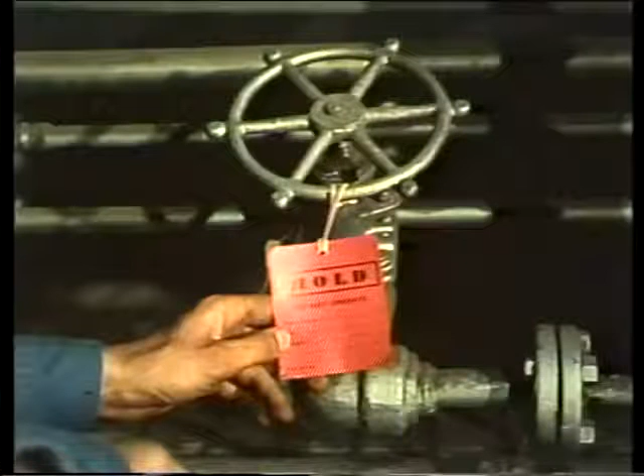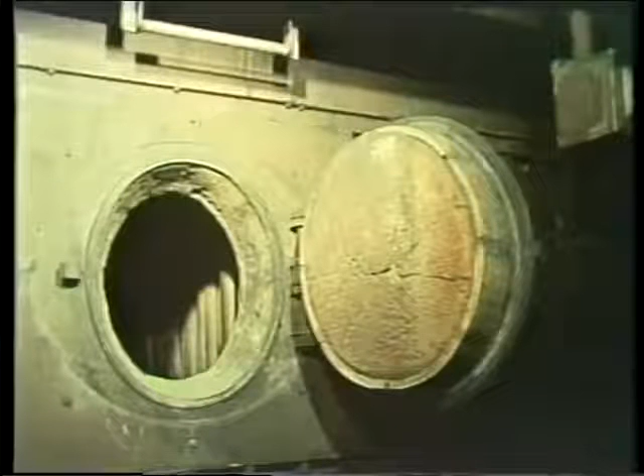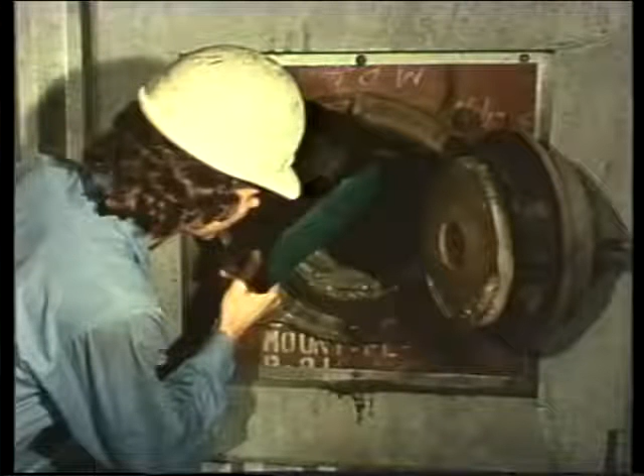Tagging out guarantees that none of the valves will be tampered with during inspection. Once the valves are tagged out, access and inspection doors should be opened to cool down the boiler. Immediately after shutdown, and while the boiler is still hot, go to every opening in the boiler and listen for leaks. If there's evidence of leaks, note the location. After you've listened for leaks, the boiler should be cooled down.

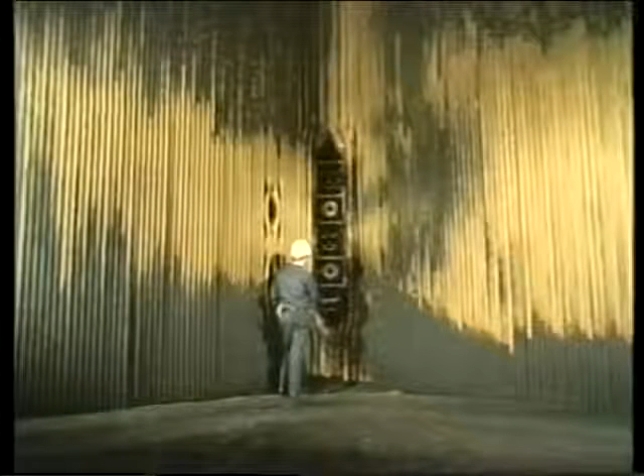Now, once these preparations are complete, the first fireside component you'll be looking at is the water walls. The water walls are made up of water-filled tubes that line the inside of the furnace. When the furnace is in operation, heat is transmitted through the tubes to the water, which is eventually converted to steam. Water walls have four common problems: overheating, support failure, ash accumulation, and refractory failure.

Overheating in the water wall tubes leads to warping, leaks, and tube blisters. Warping is caused when a section of the water wall overheats. This is fairly easy to spot. It may be indicated by a large number of leaks in a small area of the water wall. Now, tube blisters, like these right here, are bulges in the tube surface, which form when the tube metal becomes so hot that it softens and is pushed out by the boiler pressure.

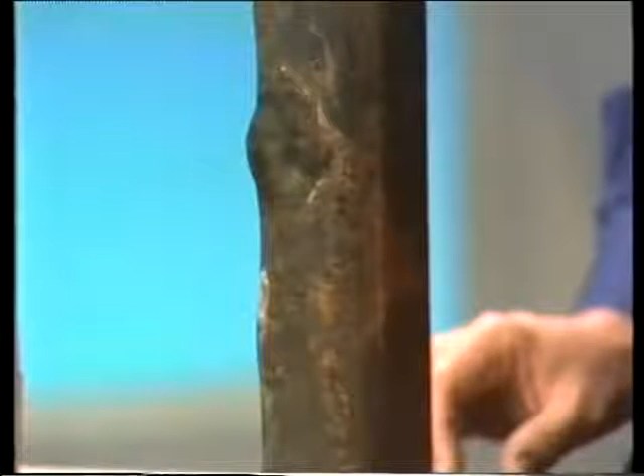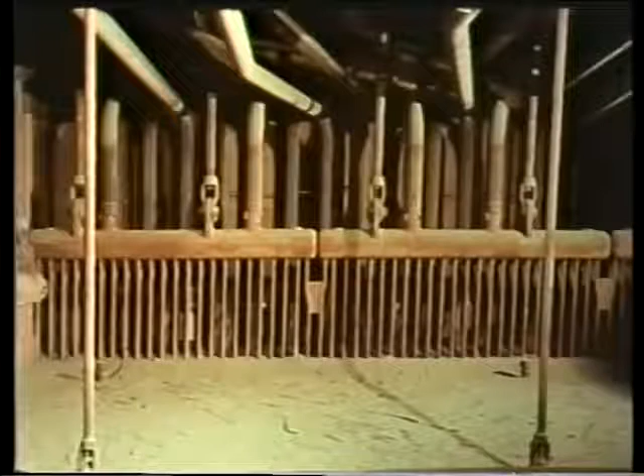Now, the next problem, support failure, shows up in the water walls as vertical misalignment of its tubes. Water walls are attached to headers that are usually hung from the top of the boiler. Now, if the supports holding up a section of the wall break, that section will sag. And if that happens, you'll see a section of tubes that is lower than the others. It's important to check this out because support failure could lead to the collapse of the entire boiler.

Now, the third problem affecting water walls is excessive ash accumulation. This can be plainly seen by looking at the water walls. There are two kinds of ash accumulation to look for: ash that adheres to the entire water wall and clinkers that are fused to it. Now, clinkers are dangerous since they're large and they can hurt someone if they fall. Be sure to clean them away before working inside the boiler.

Now, another problem we need to discuss is refractory failure. This is a piece of refractory right here. It acts as insulation in the boiler. Refractory failure usually occurs wherever refractory is exposed on the inside of the water wall. Typical areas where you can see refractory are the burner openings, the ash hopper area, inspection doors, and air inlets.

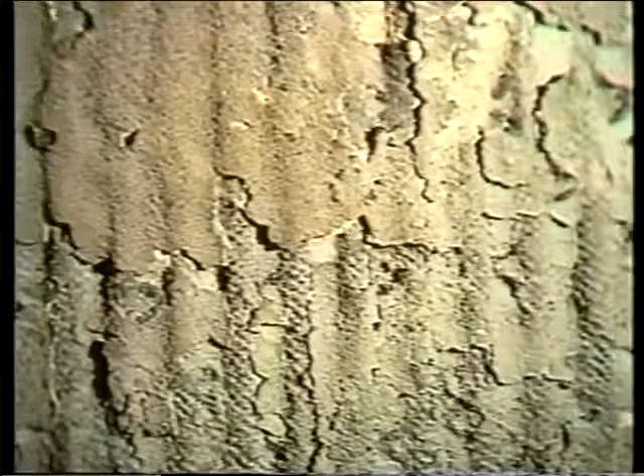And what you should look for are things like general deterioration, or cracks, or water damage. Refractory has other potential problems: spalling, cracking, and slag attack. Spalling is the flaking away of refractory. It's caused by improper installation of refractory, by sudden temperature changes, or both. Cracking is due to improper installation or sudden temperature changes.

Slag attack is the chemical reaction of ash and refractory. Slag attack erodes refractory, reducing its thickness. It melts the refractory and causes it to run off. Slag attack may also cause refractory to become soft and crumbly. In some cases, slag attack will produce a glassy surface.

Refractory failure, overheating, support failure, and excessive ash accumulation are not the only things to look for during a fireside boiler inspection. There are also metal problems, such as surface deterioration, failure of previously repaired areas, failure of construction welds, and leaks. Surface deterioration, like water wall erosion, can be caused by steam or water, fuel, combustion gases, or soot-blowing air or steam. Erosion can cause tube thinning.

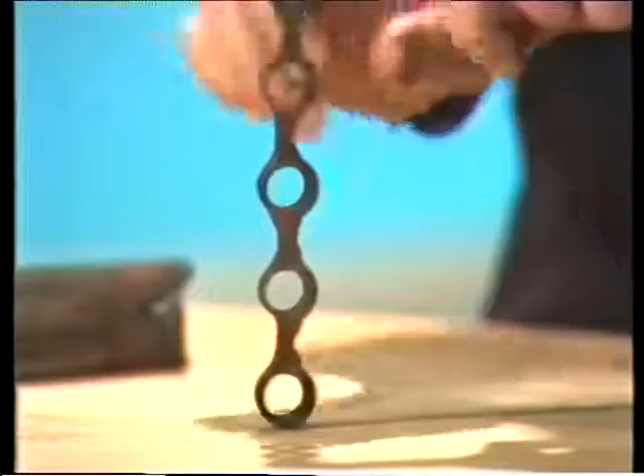Tube thinning is a serious concern because the thickness of tube metal provides strength to contain boiler pressure. Now, these tube sections were cut out of a water wall. You can see how much thinner this side is than this side. When the thickness of a tube is reduced, the tube is weakened, and this can result in tube failure.

All boiler tubes have an acceptable minimum wall thickness. When you inspect the tubes, you have to be aware of the amount of tube thinning that can be tolerated before repairs are necessary. Now, to some extent, tube thinning can be determined by looking at and feeling the tubes. You can tell that local thinning caused by erosion has occurred because you can see and feel a gouge in the affected tubes.

Erosion can happen wherever there is any flow across a boiler component. Erosion from steam or water is caused by leaks in the water wall tubes. When a tube leaks, a stream of water or steam shoots out, and if it hits a nearby tube, this stream of water or steam will wear away some metal, possibly causing more leaks. Carefully inspect the area around leaks for evidence of tube erosion. Eroded areas, as well as the original leak, should be repaired to guard against future tube failure.

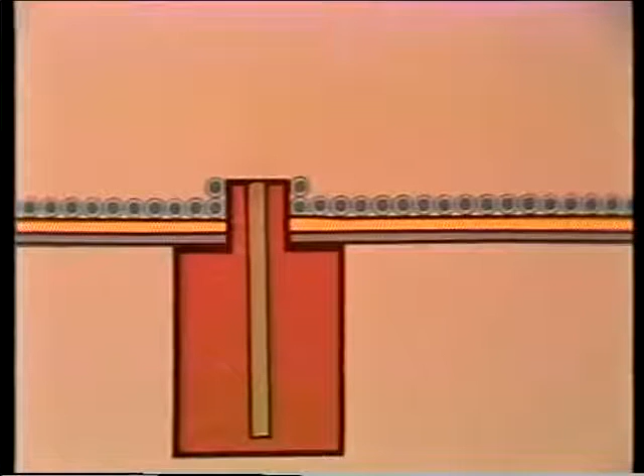Other problems besides erosion may crop up in the soot blowers. Soot blowers enter the water walls through openings that should be checked when inspecting the water wall. Look for damage to exposed refractory in and around the openings. Make sure the openings are clear of ash and slag. Also, check to make certain that all the soot blowers fully withdraw. Heat in the furnace can damage the soot blower lance.

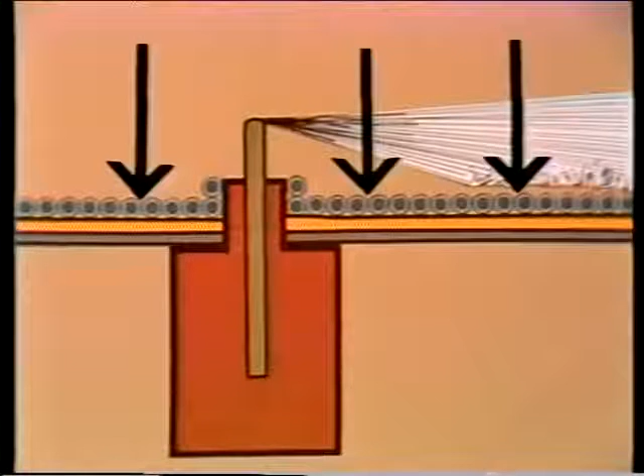Erosion is still a major concern here. Check the tubes around the soot blower openings for erosion that may be caused by steam or air coming from the soot blowers. If you find any, the soot blower may be improperly aligned, that is, blowing against rather than across the tubes. Now, if that has happened, both the soot blower alignment and the erosion must be corrected.

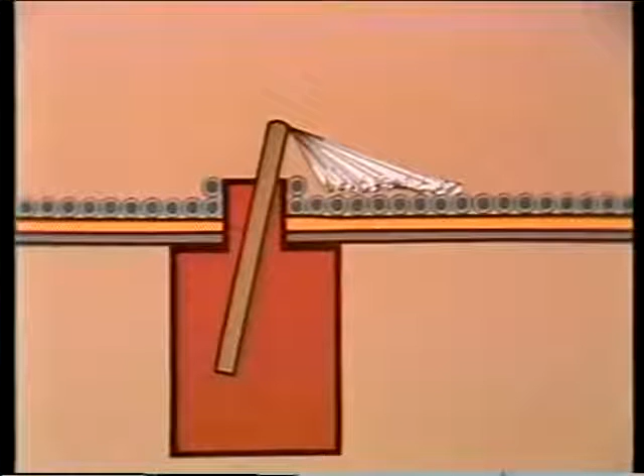Corrosion is similar to erosion. Corrosion is the gradual wearing away of metal by chemical action. Rust is an example of corrosion and is most likely to occur when tube metal gets wet. Another example is corrosion from soot or ash. Soot or ash can be found anywhere in the boiler. Generally, though, corrosion occurs in out-of-the-way places. Corrosion caused by rust, soot, or ash is detectable because of its coloration, mostly red or green or yellow.

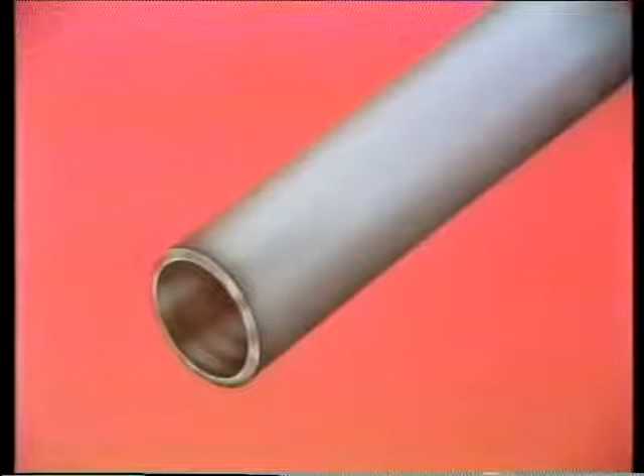Corrosion and erosion are only two problems that you might find on the outside of the water wall tubes. Other problems to watch for are pitting, cracking, and scale formation. Pitting is a type of corrosion and appears as small craters in the surface of the tube metal. In severe cases, pitting can weaken the tubes, eventually causing failure. Cracking can also result in tube failure. Any sized crack in the tube surface weakens the tube. Once a crack is formed, it tends to grow deeper. Over a period of time, the crack will penetrate the tube wall and cause a leak.

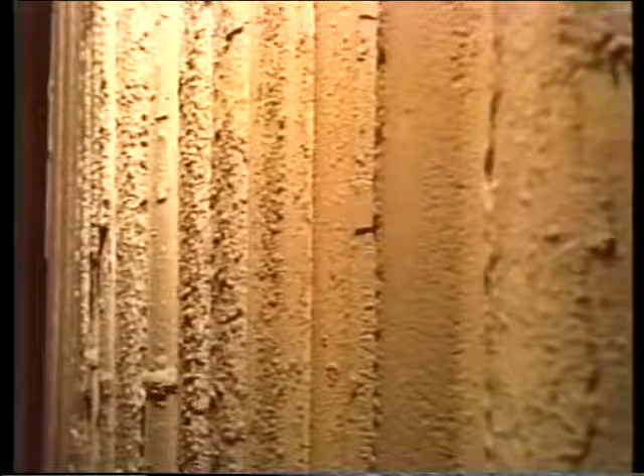Finally, scale on the outside of the tubes presents two problems. For one, scale, like ash, insulates the tube and prevents proper heat transfer. This reduces boiler efficiency. The second problem is that corrosion may occur beneath the scale where it can't be seen.

Checking for all these problems does not end your inspection of the water wall. Old repairs must also be checked. Careful records should be kept of each repair, what it was and where it was located. During each inspection, previously repaired areas should be examined to make sure the repairs have not failed. A failure that happened in a particular area once may happen there again.

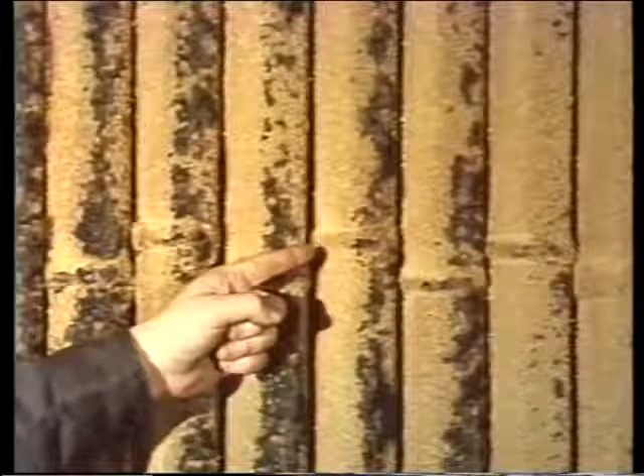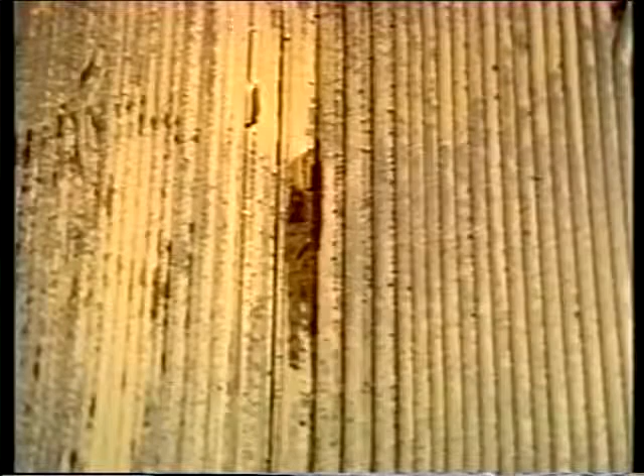Another water wall item to check out is construction welds. These joined the tubes together when the boiler was first built, and they're subject to leaks. Leaks in general are the fourth potential problem in the water wall tube metal. Since the boiler is shut down during inspection, water may not be spouting out of the leaks unless the boiler is under pressure. So, to detect leaks at the welds, look for dampness on the tubes or discolorations of the water wall. Any visible erosion or corrosion anywhere may be evidence of leaks. Also, any tube crack may be a leak.

We've gone over 4 potential problems with the metal in the water wall tubes. Surface deterioration, including erosion, corrosion, pitting, cracking, and scale formation. Failure of previously repaired areas. Failure of construction welds. And leaks.

Earlier, we covered preparations for a fireside inspection and many of the problems you must look for in the water walls. Let's pause for a few minutes so you can review all of this material before we continue.

Now that you're familiar with some of the problems to look for during water wall inspection, let's discuss how you find them. We'll go over some inspection procedures and why they're needed. Boiler inspection actually starts before you enter the boiler. Listening for leaks, for example, is part of that pre-entry inspection. Most of the inspection, though, takes place after the boiler has cooled down and you can get inside. Once inside the boiler, you can determine the exact location of leaks identified during your pre-entry inspection.

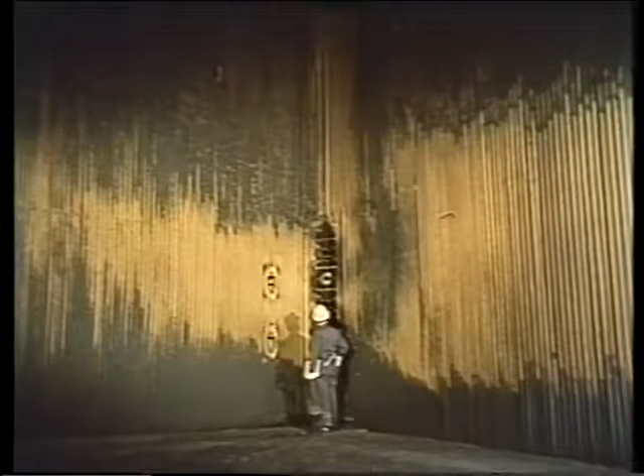You might be wondering how you can get close enough to the boiler components to inspect them. After all, a good-sized boiler may have water wall 150 feet tall, and it's difficult to see the kind of details we've been discussing if you're looking up at them from the bottom. Well, there are 2 ways of coping with this distance: movable and fixed scaffolding. A movable scaffold, like a spider, can be used for looking over most of the water wall.

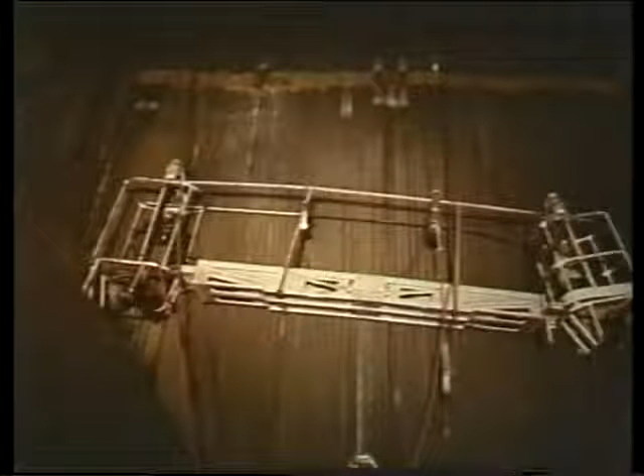Fixed scaffolding can be erected inside the furnace to reach areas that need to be inspected. You probably won't use fixed scaffolding unless extensive work must be done on the water wall. Scaffolding can be hung from the furnace roof or built up from the bottom of the furnace. Fixed scaffolding provides a stable work platform, but it takes a long time to build.

You can also inspect the water walls from the bottom of the furnace and through the inspection doors. It's easy and quick, but it's not very thorough. Using a spider is more thorough, while fixed scaffolding gives access to a larger area. Whatever method is used, the best possible lighting should be rigged in the boiler in order to improve your visibility.

When you begin the inspection process, there are several tools that you should have with you: an inspection mirror, a small hammer, a scribe tool or knife, a wire brush, and a flashlight. An inspection mirror will be useful when you look at the water wall through the inspection doors. Use it when inspecting places in the water wall that are not easily accessible.

Now, a scribe tool or knife is used to scrape away ash buildup and scale to expose the bare metal. A wire brush can also scrape away ash and scale. A flashlight is needed because the boiler's normal lighting may not be adequate.

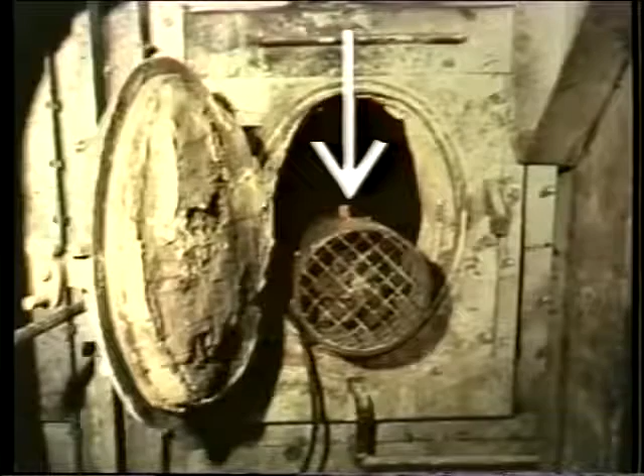Make sure there's adequate ventilation in the boiler. One way of doing this is to set up a fan in the inspection door like this. Also, make sure that no harmful gases are present. Clinkers and accumulations of ash should be removed from the boiler walls. You don't want them to fall on you while you're inside the furnace.

Besides standard safety gear like a hard hat and safety shoes, additional equipment including eye protection, gloves, protective outer clothing, and ear protection might also be necessary. Special precautions are needed when you're above the boiler floor. For example, using a spider calls for additional safety precautions because you're working at great heights.

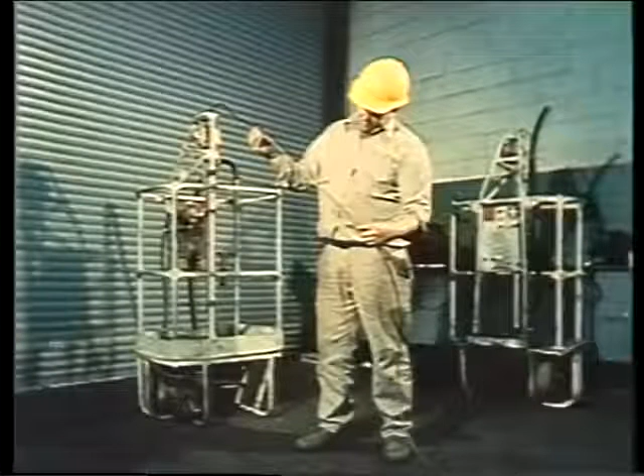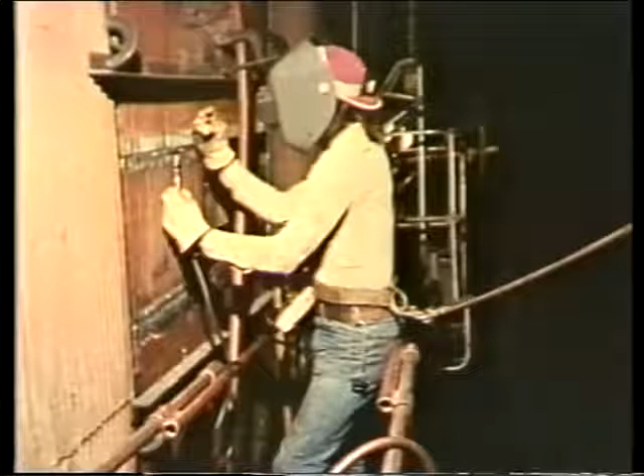Before the spider is installed in the furnace, check its cables and hoses. Make sure they're in top condition. When you're ready to go up, have all your tools with you. These should be tied to you or to the spider. You don't want them falling on someone below. Wear a safety harness with safety lines attached. Also, check how much weight the spider can carry to ensure against overloading.

Watch for chafing of the spider cable, and don't forget to read through your plant safety manual and comply with all of its requirements. Fixed scaffolding also requires special safety precautions. If you use scaffolding, make sure it complies with your plant safety manual. Again, don't overload it, and secure all tools.

Whether you're using a spider or scaffolding, if you find an unusual condition or a failure, you should photograph it. Photographs make your description of the problem easier to understand, and they serve as a permanent visual record of what went wrong. Well, we've now covered general tube thickness and soot blower problems, visual inspection techniques, and ones that use measuring devices, and the importance of safety precautions. So take a few minutes now to clear up any problems or questions you might have.

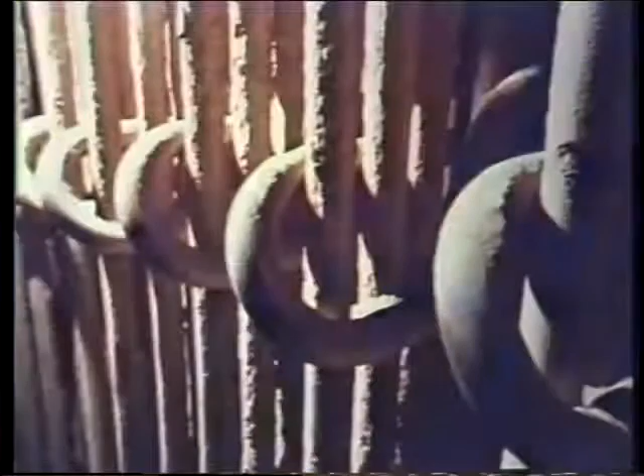There are still 4 other water wall problems we need to talk about: clinker damage, flame or fuel impingement, trouble with burner openings, and trouble with inspection doors. Now, clinker damage occurs when clinkers high in the furnace fall and hit the water wall tubes at the bottom of the furnace. This causes tube bending, crimping, and denting, and it also wears away the tube metal.

Severe bending is a serious problem because it'll restrict water flow, which leads to tube overheating and failure. Wearing away of the tube can result in tube failure as well. Be sure to check for all these conditions when you inspect the clinker impact area at the bottom of the boiler. Flame and fuel impingement occur near the burners. Impingement is the throwing of flame and fuel against the water wall rather than into the center of the furnace.

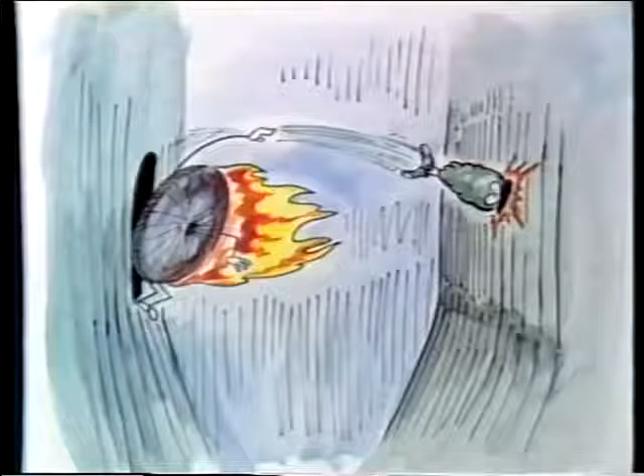Flame impingement can be detected by discoloration or blistering of boiler tubes in the burner area. Fuel impingement is found in the same general area as flame impingement and causes tube erosion. Look for this erosion as well as fuel accumulation to detect fuel impingement. Another cause of fuel impingement is faulty burners that throw unburned fuel across the furnace. If you find fuel impingement, you're likely to find flame impingement as well, so be on the lookout for both.

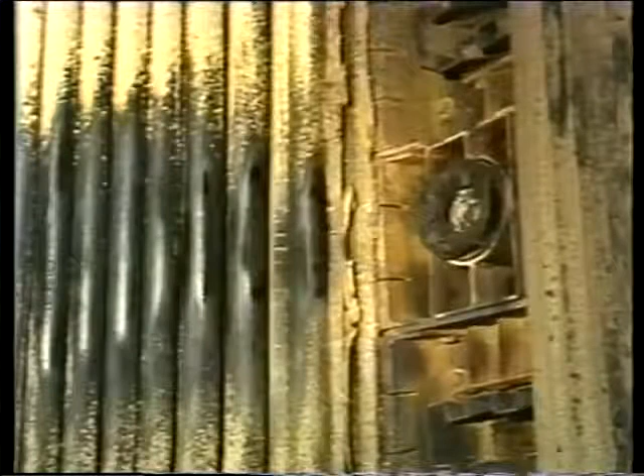If you find fuel or flame impingement, the burners must be examined carefully. Burner parts must be checked for wear due to erosion, damage from heat, and improper alignment. If there's evidence of flame or fuel impingement on the water wall, check your boiler's manufacturer's manual for alignment instructions.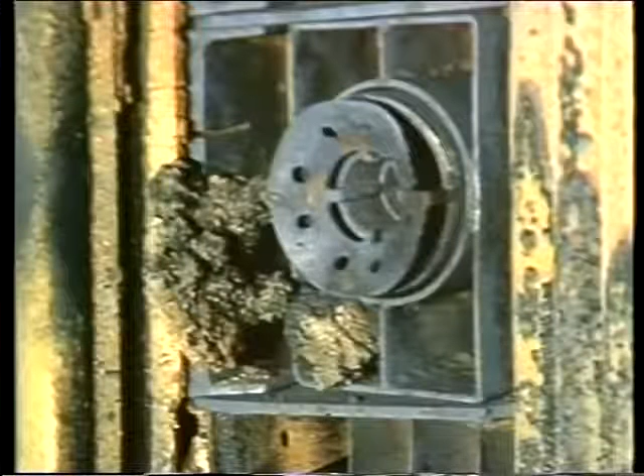Refractory at the burner opening should also get close attention. This refractory is exposed to particularly high temperatures. While checking this refractory, look to see if ash and slag have accumulated on the refractory or in the burner opening. They could prevent proper burner operation by obstructing the burner openings where fuel enters the boiler.

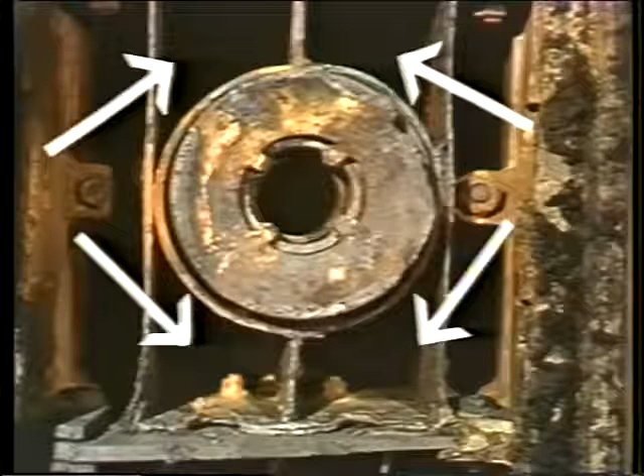Burner openings in the water wall contain air ports that supply combustion air to the furnace. Sometimes air ports are built directly into the burner. These should be inspected to make sure they are clear and are allowing a free flow of air. Also, make sure they're not deformed. Deformed air ports alter the correct pattern of air flow.

When looking at inspection doors from inside the boiler, watch for two things: blockage from ash or slag accumulation and deterioration of the refractory in the inspection door openings. While checking the water wall, inspect the radiant superheater if your boiler has one. A radiant superheater is built into the furnace wall just above the water wall.

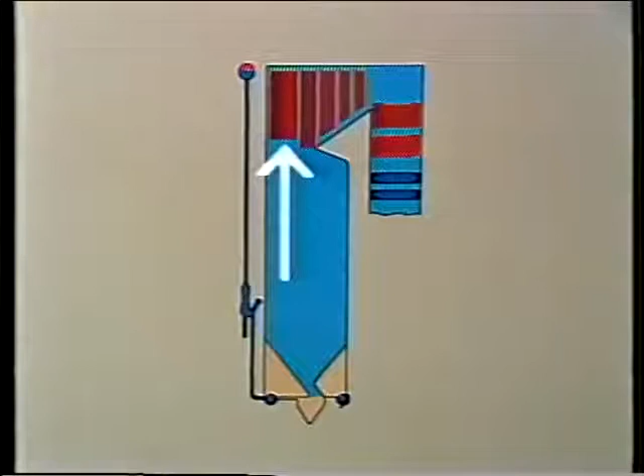Since the radiant superheater is located in the same area as the water wall, you should inspect both at the same time. Radiant superheaters can have the same problem as any other boiler component. These include overheating, support failure, excessive ash accumulation, and failure of refractory around the superheater. Typically, this refractory will not be inside the superheater, but found in the walls near the superheater.

Also, look for metal problems: erosion, corrosion, pitting, cracking, or scale on the tube surfaces, failure of construction welds, and leakage. Finally, since radiant superheaters are made of tubes, you must also check for tube thinning, soot blower problems, and deterioration in those areas where tubes enter and exit the boiler.

Radiant superheaters can have many of the same problems as the water wall because both are located in the same general area. These same kinds of problems occur throughout the entire boiler, but most components also have some individual features that require inspection. As I've said, many of the problems that affect the water walls can occur throughout the boiler. With that in mind, and remembering that your inspection actually begins while the boiler is still pressurized, let's talk about problems and problem areas in the superheaters and reheaters.

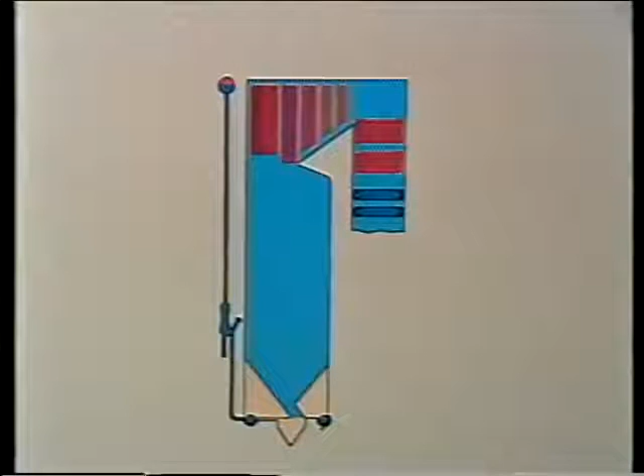There are many names for superheaters based on the way they absorb heat, their location in the boiler, and their tube arrangement. Superheater names will vary from plant to plant, but we'll cover some typical ones. We've already talked about one type, the radiant superheater. Now we'll discuss some others: the platen, pendant, and horizontal superheaters. We'll take them as a group because their construction and kinds of problems are very similar. We'll include reheaters here for the same reason. Remember, superheaters and reheaters are different components, but they are built in much the same way and suffer from similar problems. So the material we'll cover applies to both.

General problems that show up in superheaters and reheaters include overheating, support failure, excessive ash accumulation, and refractory failure around the superheaters. Overheating in superheaters and reheaters can be detected by warping, leaks, and tube blisters. Warping is immediately apparent when you examine the component. Superheater and reheater tubes are supposed to be in line and parallel to each other. If warping has taken place, the tubes will literally stick out like a sore thumb.

Warping may also cause an additional problem. Warping alters the distance between tubes, which in turn changes the flow pattern of the gases passing through the superheater. The flow can then become channeled in such a way that erosion increases on some tubes while ash builds up and collects in other places. Check for these when you find warping. And while you're in the area, be on the alert for leaks.

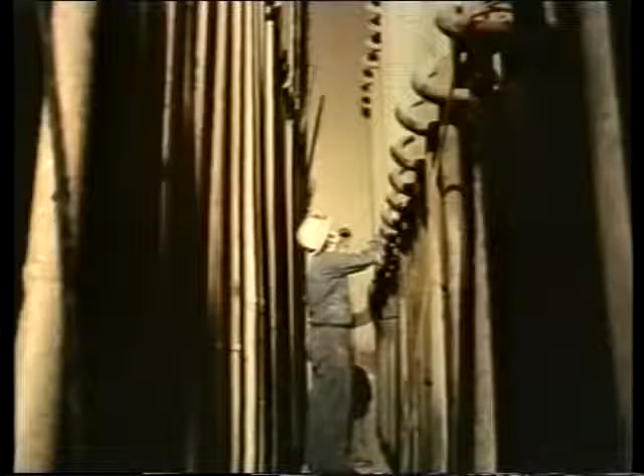If you find a leak in the superheater or reheater tubes, the area around them should be inspected for blisters. Blisters are an indication of overheating. Blisters can be pretty hard to find, especially if they occur on a tube inside the superheater bundle. One way to check these hard-to-find blisters is to shine a light along the length of each tube. And if a tube is blistered, the blister will cast a shadow.

It is important that you recognize warping, leaks, and tube blisters as symptoms of overheating. Understanding the primary cause of these problems will make a difference in the way you deal with each one. For example, there might be operational adjustments that can be made to correct overheating. Another general problem in superheaters is support failure. Watch for support failure when inspecting the superheaters. Total support failure is a very serious problem because it can lead to collapse of the superheaters.

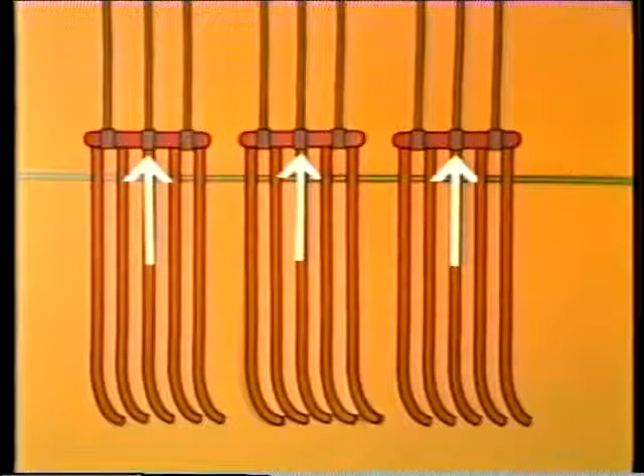Pendant and platen superheaters are suspended from the top of the boiler. Each tube element is attached to headers located outside the hot gas path. The headers have their own supports. If the header supports break, you may not be able to see the break itself, but you will notice that the superheater tubes are out of position.

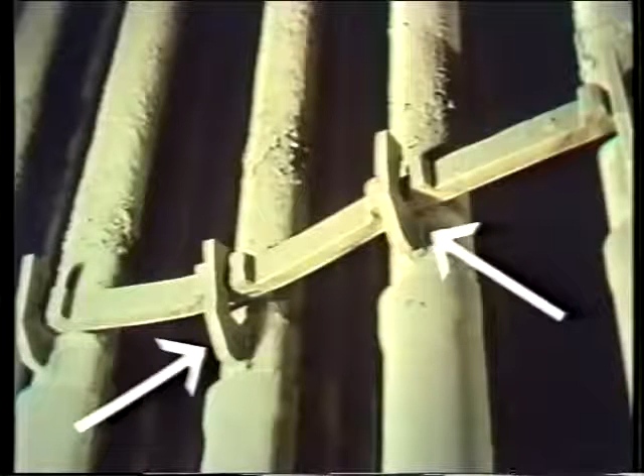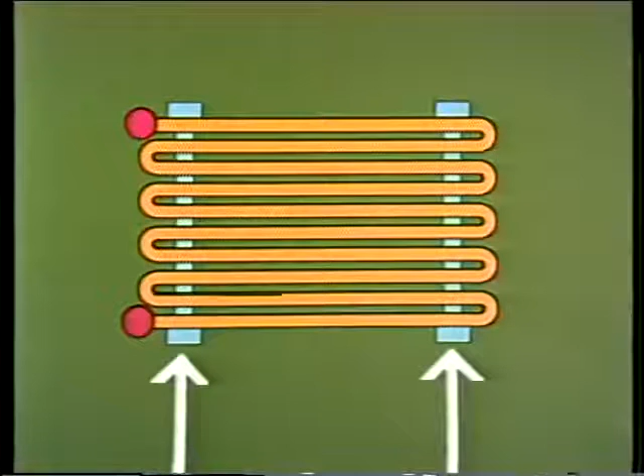Another thing to look for during superheater inspection is clip and tie bar failure. Clips and tie bars hold the superheater elements in proper position in the hot gas path. Failure of clips and tie bars makes it easier for tube elements to warp out of position. Some supports for the horizontal superheaters are located within the hot gas path. Usually this kind of superheater is supported from above. However, there may be tie bars to hold the superheater's bundles together. Tie bars also provide support for the lower parts of the tube elements.

Since these supports are exposed to hot gases, they're more likely to fail than supports located outside the hot gas path. Regardless of the type of supports a superheater uses, all superheaters and reheaters, like all boiler components exposed to ash, are subject to excessive ash accumulations. Now, some of this ash accumulation is unavoidable. But the important points to remember here are that it is important to detect ash accumulation and that areas near the accumulation should be closely examined.

The final problem common to most boiler components is refractory failure. Refractory in the superheater and reheater areas is no different from refractory elsewhere in the boiler. You should look for the same kinds of refractory failures in the superheaters and reheaters that you look for in the rest of the boiler, especially spalling and cracking.

Well, we've now discussed 4 more water wall problems: clinker damage, flame and fuel impingement, trouble with burner openings, and trouble with inspection doors. We've also covered some things to look for in the superheaters and reheaters, including overheating, support failure, excessive ash accumulation, and refractory failure. Let's take a few minutes to go over the material in your texts and clear up any questions or problems you might have.

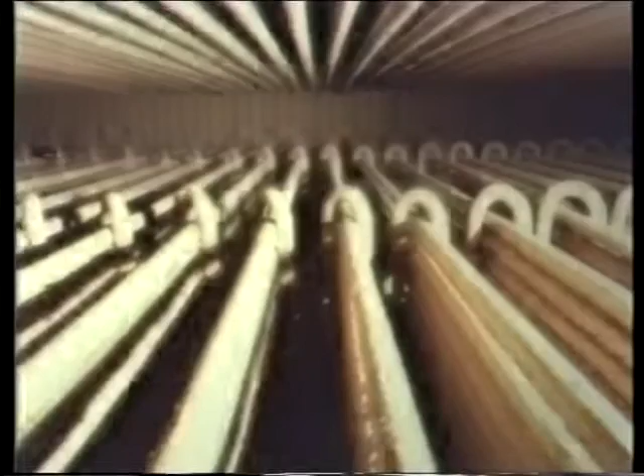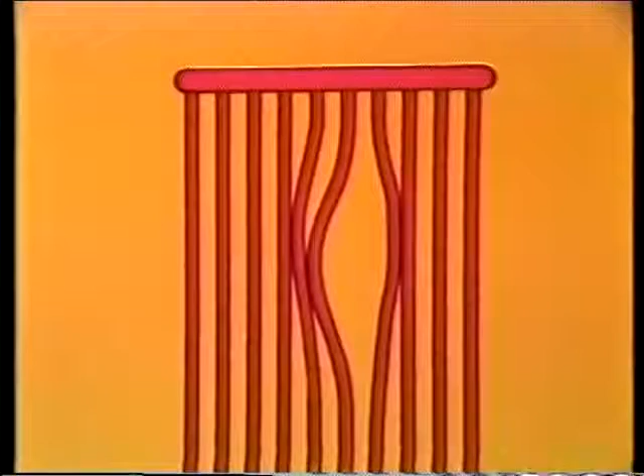There's another group of problems in the superheaters and reheaters that's common to all metal boiler components. This group includes erosion, corrosion, cracking, problems in areas of prior repairs, problems with construction welds, and leakage. Accelerated erosion is caused by warping and ash blockage. Erosion is therefore most likely to appear where gas flow is particularly rapid or where ash concentration in the gas flow is particularly heavy. Ash concentration may be heavy where gas flow makes a turn. Tubes at the outside of the turn are especially vulnerable to ash erosion because there the gas flows faster and loose particles tend to become more dense and abrasive.

Erosion in the superheaters and reheaters can also be caused by a steam jet from a leaking tube. A steam jet from a leaking tube can erode the metal of adjacent tubes until they also leak. When inspecting superheaters and reheaters, be sure to look for evidence of erosion in areas around known leaks. Also, eroded areas may indicate leaks that were not previously detected.

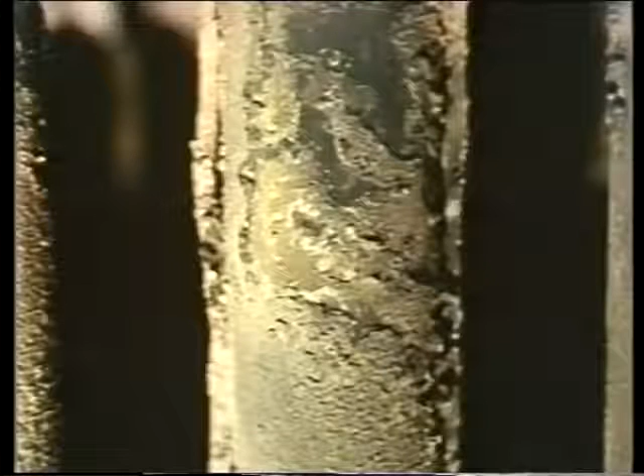The next metal problem is corrosion, a chemical attack of the tube metal. Corrosion can be caused by the metal's exposure to air and water, resulting in rust, exposure to acid formed by sulfur in the fuel combining with water, and exposure to corrosive scale. Corrosion can be indicated by discoloration or pitting of the tube metal. Tubes with scale on their outside surfaces should be scraped in several places to determine if corrosion is taking place beneath the scale. Corrosive scale is most common in oil-fired boilers, so be alert for corrosive scale when inspecting oil-fired boilers. Regardless of the fuel used to fire a boiler, all tube surfaces must be inspected for erosion and corrosion.

Something else to look for on the tube surface is cracking. Superheater and reheater tubes are more susceptible to surface cracks than water wall tubes. This is because superheater and reheater tubes operate with higher metal temperatures than water wall tubes. Another area of concern are places in metal components that have been previously repaired. Prior repairs must be inspected closely. To inspect them, you need to review the records of what work was already done. These records also indicate which areas of the superheaters have had past problems, and that should give you some idea of where you might expect future trouble.

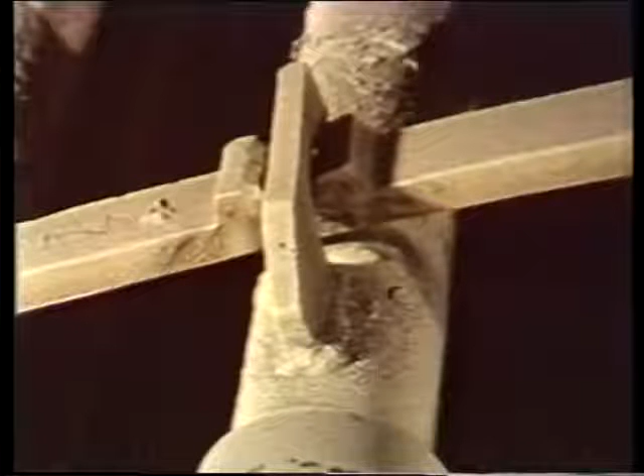Construction welds present other areas for potential failures. It's particularly important to inspect welds in the superheaters and reheaters because they may connect two different metals. Superheaters and reheaters are often made of several different metal types. Bimetallic welds join two kinds of metal and are especially prone to failures. Attachment welds may also be found in the superheater. These welds hold support clips on the tubes. Tube failures are common in the areas around these welds.

The final problem concerning metal components is leakage. And remember, right now, we're talking about inspection with the boiler depressurized, so you might not see the leakage. However, any evidence of leakage should be noted and the source of the leak determined. This may require some very careful investigation. But one way to detect leaks when the boiler is shut down is to use compressed air to pressurize the superheater. This makes it possible to hear air escaping from any leaks.

Well, now that we've talked about problems with metal components, we'll discuss two more problems that occur in tube-type components: tube thinning and soot blower problems, both of which also showed up in the water walls. Tube thinning affects the tube's strength and ability to contain pressure.

It can sometimes be detected by direct observation, but for a more precise measurement of tube thinning, an ultrasonic instrument must be used. Now, with this, you measure tube thickness on a worst-case basis. For example, if one section of the tube exhibits severe ash erosion, you would take measurements in that area. Wherever a tube has a bend in it, you have a possible area for erosion.

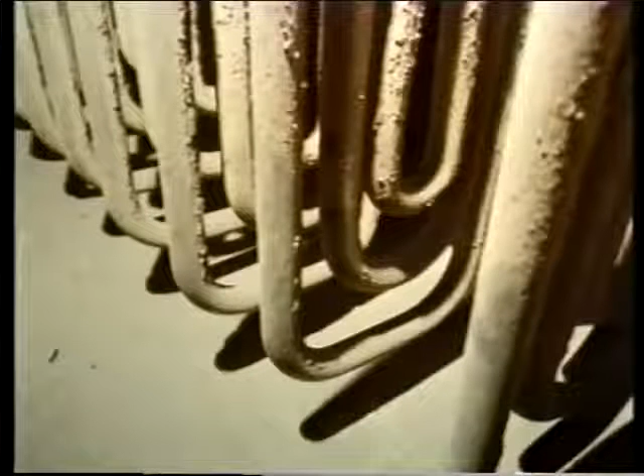Erosion takes place on the inside of the tube, but it is usually detected from the outside. Measurement from the outside of the bend should indicate whether tube thinning from erosion is occurring on the inside of the tube. Soot blowers are the source of other problems in tube-type components.

If your boiler uses retractable soot blowers, the soot blower openings should be inspected. Look at the refractory conditions, making sure the openings are free of ash and slag. If the soot blowers are retractable, they should move all of the way out of the boiler. Permanently installed soot blowers, on the other hand, have different problems.

Check permanently installed soot blowers for warping or other damage from heat, improper alignment, erosion, blockage or wear of the blowing nozzles, and improper attachment. In the soot blowing areas of both kinds of soot blowers, you should inspect boiler tubes for erosion caused by the soot blower.

Inspecting the superheater to find these problems is usually easier than inspecting the water walls. Access to the superheaters is generally accomplished by crawling through doors at either end of the tube bundles. Usually only a minimum amount of scaffolding is required for access. Now that doesn't mean that the superheaters don't pose problems.

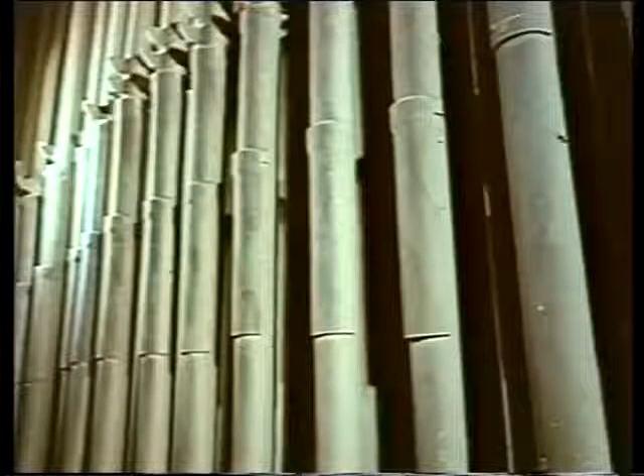Platen superheaters are hung above the furnace and can only be reached by scaffolding or spiders. Other kinds of superheaters present a unique access problem because of their construction. Their tubes are packed so tightly together that the outside tubes in a bundle prevent close examination of the inside tubes.

When it's necessary to work on the inside tubes, access to them is gained by spreading the outside tubes apart. They are then held out of position until the work is completed. Now, this tube spreading method is effective, but it is time-consuming and not practical for periodic inspection.

An adequate inspection can be done by looking down the aisles in the superheater bundle, and this long-handled inspection mirror will allow you to look inside the bundles more closely. Spreading the tubes solely for inspection purposes should only be done as a last resort. Other than tube spreading, superheater and reheater inspection uses the same techniques and tools as water wall inspection.

Well, our discussion of superheater and reheater inspection centered on several groups of problems. One group of problems was common to almost every boiler component: overheating, support failure, excessive ash accumulation, and refractory failure.

Another group of problems concerned metal components: erosion, corrosion, cracking of the tube surface, problems with areas previously repaired, problems with construction welds, and evidence of leakage. The two other types of problems we went over affected tube-type components. These were tube thinning and problems with soot blowers.

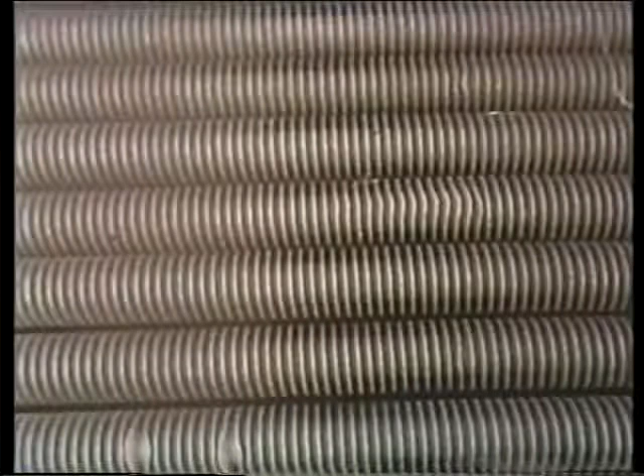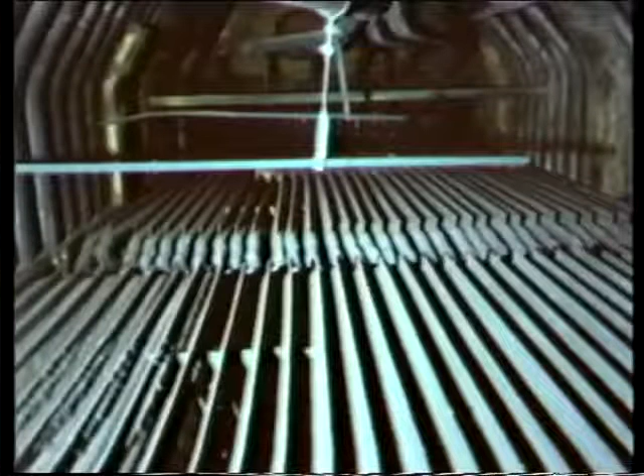So far, we've inspected the water walls and the superheaters and the reheaters. Well, it's time now to inspect two more boiler components: the economizer and the bottom ash hopper. Economizers are affected by general boiler problems: overheating, support failure, excessive ash accumulation, and refractory failure. Since the economizer is a tube-type component, it's also subject to tube thinning and soot blower problems.

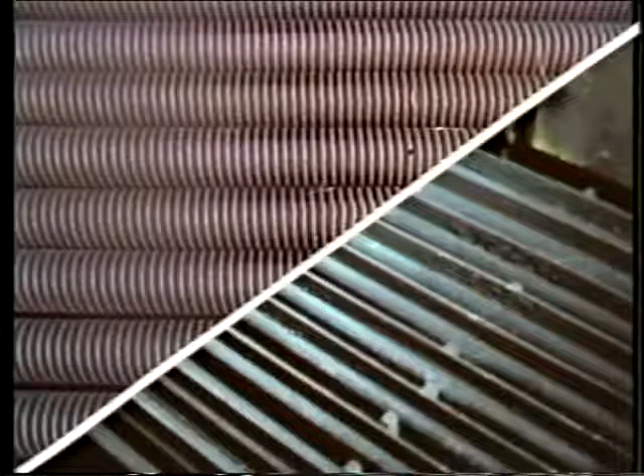Excessive ash accumulation is a particular problem in the economizer. Most economizer tubes have fins or gill rings that can become blocked with ash more easily than bare tubes. There's another problem. Economizers are subject to accumulations of unburned fuel. Now, this is a fire hazard and is potentially explosive. When checking for ash blockage in the economizer, be sure to see if the ash includes unburned fuel.

The economizer should also be checked for erosion, corrosion, general surface deterioration, problems with old repairs, problems with construction welds, and evidence of leakage. Economizer tubes are especially prone to corrosion because the economizer area has the lowest temperatures of the components we've discussed, so condensation is more likely to form in the economizer. Condensation leads to corrosion, especially if the boiler fuel has sulfur in it.

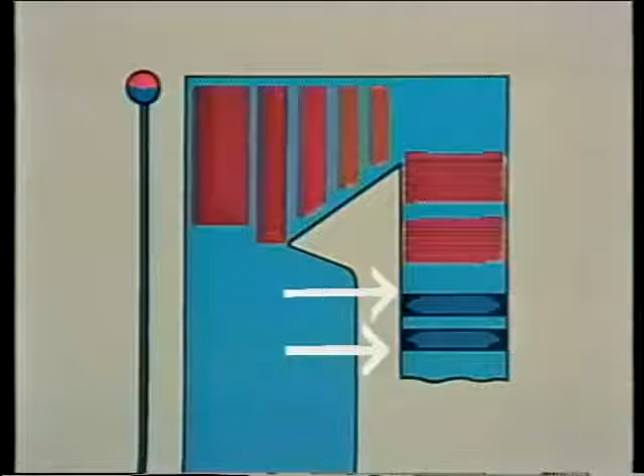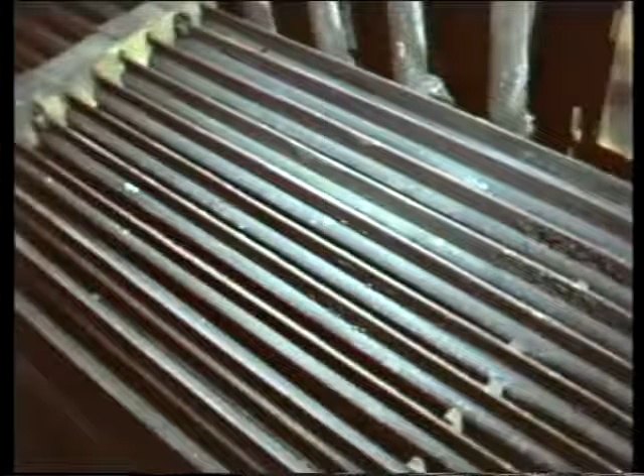Corrosion often shows up in the row of tubes where the hot gases leave the economizer. Comparing the outlet row of tubes with that of the inlet row of tubes should give you some idea of how much corrosion has taken place throughout the economizer. To inspect the economizer, techniques are used that are similar to those for inspecting the superheater. Like the superheater, economizers have tubes packed so close together that it's difficult to see the tubes within the bundle.

Inspection of the inside tubes is generally made by looking down the lanes between the tubes. And here too, closer inspection can be accomplished by using a long-handled inspection mirror. As a last resort, the tubes may be spread apart to provide access to the inside of the bundle. It's important to look at the inlet and the outlet row of tubes because they're accessible, and their condition will give you an idea about the condition of the inside tubes.

Another component that requires inspection is the bottom ash hopper. Now, the bottom ash hopper must be examined for 5 problems that affect the refractory inside the ash hopper. These are the effects of rapid temperature change, ash buildup, erosion, surface deterioration, and problems in previously repaired areas. The bottom ash hopper can have refractory problems caused by the bottom ash that collects there.

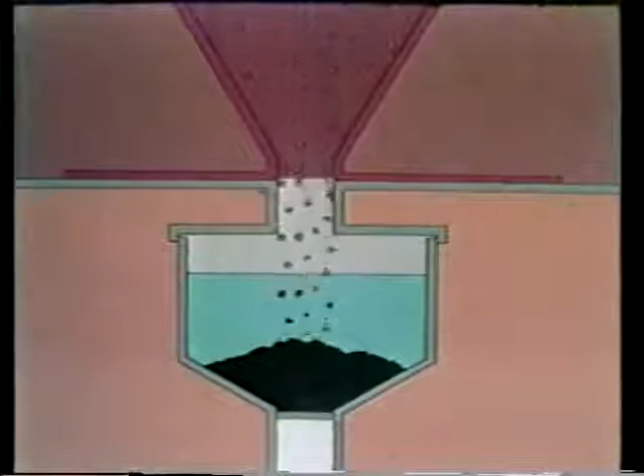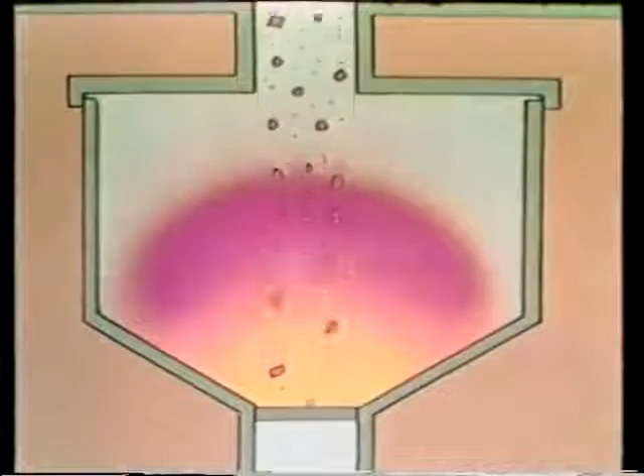The ash is very hot when it enters the hopper. Normally it is cooled quickly by water in the hopper. However, this water must be drained every once in a while to get rid of the accumulated ash. While the hopper is empty, hot ash can heat the refractory on the inside of the hopper. This problem is made worse by the sudden temperature change that occurs when the ash hopper is refilled with water. The combination of heating and then sudden cooling of the ash hopper can lead to spalling and cracking of the refractory.

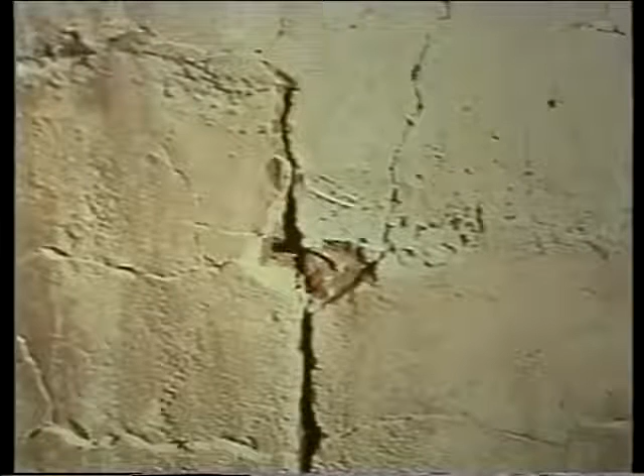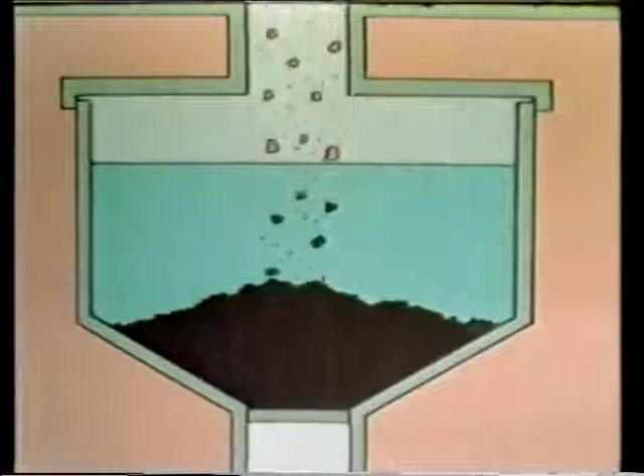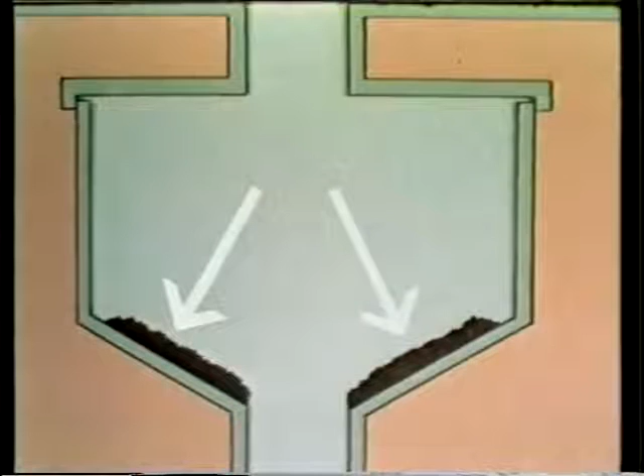Ash buildup is another problem in the bottom ash hopper. All bottom ash should be removed from the hopper when it is drained. Some ash may remain in the hopper if the spray nozzles are misaligned. If some ash does remain in the hopper, note it during inspection. The remaining ash will have to be removed manually. Early detection and correction of a problem within the ash hopper will avoid repeated manual ash removal.

Another problem that can show up in the ash hopper is erosion of the refractory. Anytime water flows over refractory, there's the possibility of erosion. Be sure to check the general surface condition of all of the refractory inside the ash hopper. Things to look for include spalling, cracking, and erosion. Also, if you can see refractory anchoring devices at the refractory surface, the refractory is either badly worn away or was improperly installed.

Previously repaired areas must also be checked when inspecting the ash hopper. Refractory breakdown in the bottom ash hopper is a fairly common occurrence. An ash hopper's refractory may be repaired many times, so inspect the refractory to make sure it's holding up.

4 more areas in the ash hopper are concerns during an inspection: the boiler bottom seal, the ash spray pipes and nozzles, the ash gate, and the ash hopper inspection doors. These are only general areas in the ash hopper, the ones that I've mentioned here, so some boilers will have even more places that require inspection. The boiler bottom seal is a seal between the boiler and the ash hopper. The boiler bottom seal isolates the furnace from its surroundings.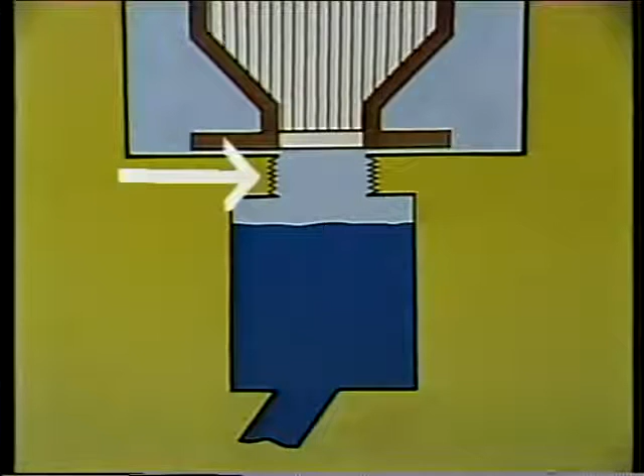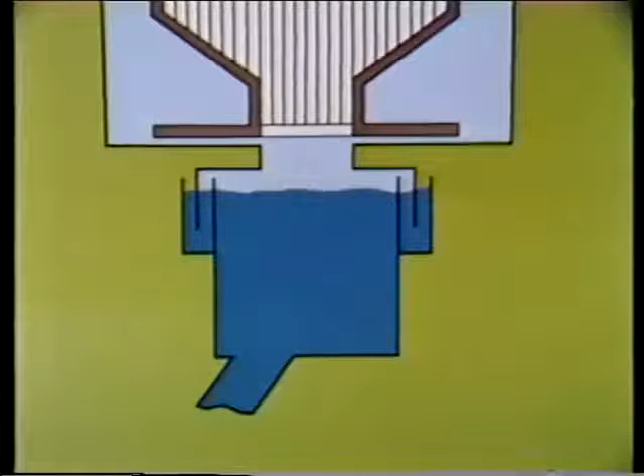2 typical seal types are the corrugated seal and the sliding seal. The corrugated seal type allows the boiler wall to expand. The corrugated seal is accordion-like, an accordion made of corrosion-resistant steel. The sliding seal type is an overlapping metal joint which allows the boiler wall to expand. This type of seal uses water to prevent any flow of gas into or out of the boiler.

Boiler bottom seals should be inspected for the 5 basic common problems we discussed earlier: overheating, ash buildup, erosion, general surface deterioration, and problems with old repairs. In addition, the metal parts of the seal may be corroded. Your inspection should verify that the seal between the ash hopper and the boiler is tight. Also, there must be nothing to prevent the expansion of the water wall. If you have any question regarding how your boiler's bottom seal works, consult your boiler manufacturer's instruction book.

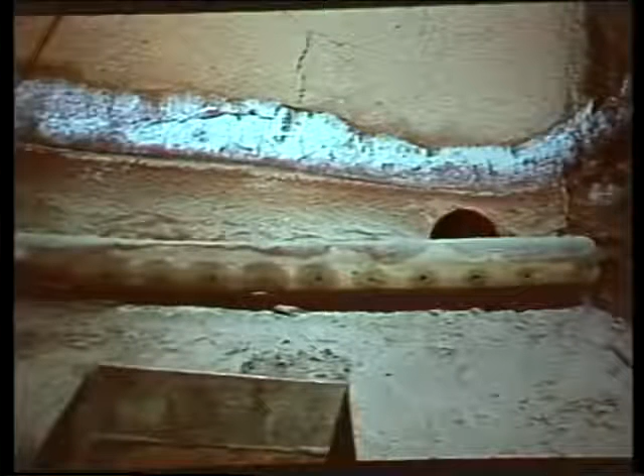Most ash hoppers use pressurized water to stir up the bottom ash being removed from the boiler. This helps get all of the ash out of the boiler. Pipes and nozzles are used to direct the water spray. You must inspect these pipes and spray nozzles for ash blockage and misalignment caused by clinkers falling on them. The nozzles are aligned correctly if they direct their spray towards the ash gate, that is, where the ash leaves the boiler. And the nozzles should not spray directly at the refractory.

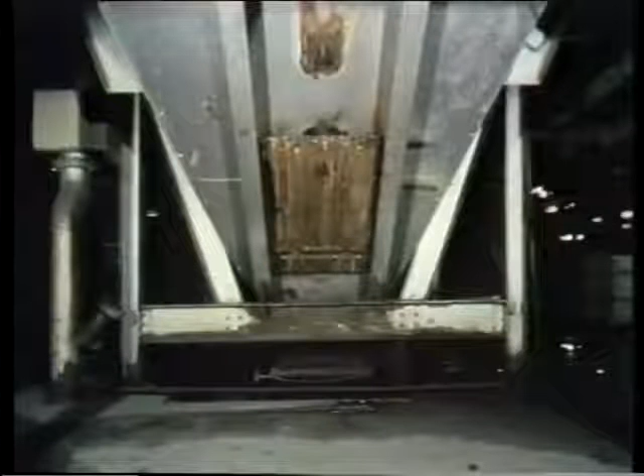That'll wear it away. The bottom ash hopper's ash gate should be inspected for proper operation by opening and closing it several times. The ash gate is underwater most of the time, so it has its own seals to prevent leakage. When you inspect the ash gates, these seals should be checked for any signs of leakage. These include corrosion, nicks, tears, burn spots, and torn gaskets. Like the ash gate, some of the ash hopper inspection doors are usually underwater. These must also be examined for leakage. All the inspection doors should be checked to verify that they're in good working order.

Well, we've now discussed inspections of the boiler's economizer and ash hopper area. You've seen some of the potential problems. You should have a pretty good idea of what to look for when inspecting the inside of a boiler. When your inspection is finished, there's one final procedure you must never forget. Be absolutely sure that no one is left inside the boiler. Now, this may sound obvious, but it's truly a matter of life and death. Be positive that no one is left inside that boiler after inspection.

Also, before putting the boiler back into normal operation, clear away scaffolding, tools, rags, anything else you may have brought inside. In short, after inside inspection, empty the boiler of everything: people, equipment, trash. Now, that's the last step for inspection inside the boiler. Still to come is the inspection of the outside of the boiler, which we'll discuss after you take some time to go over all of this material in your text.

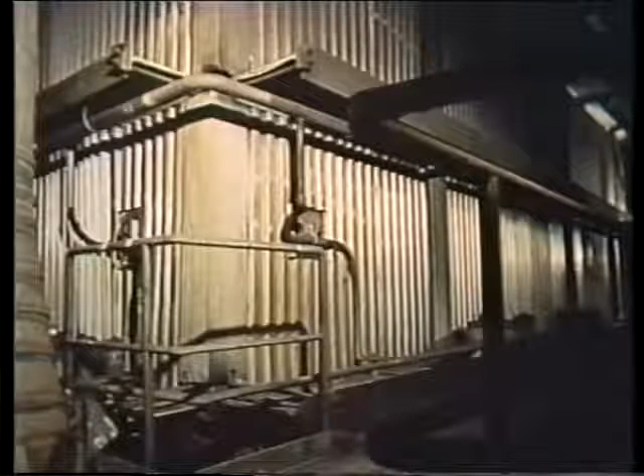The boiler casing, which is the outer steel skin of the boiler, is subject to those 5 common problems we keep seeing throughout the boiler: overheating, support failure, corrosion, problems in areas of prior repairs, and problems with construction welds. Some signs of overheating are burned or blistered paint. In fact, the casing may even get red hot. Overheating of the boiler casing leads to buckling. This is caused by expansion of the casing metal. You can detect buckling by bulges and cracks in the boiler casing. Casing buckling can cause problems inside the boiler, so look closely at the inside components in the area where buckling takes place.

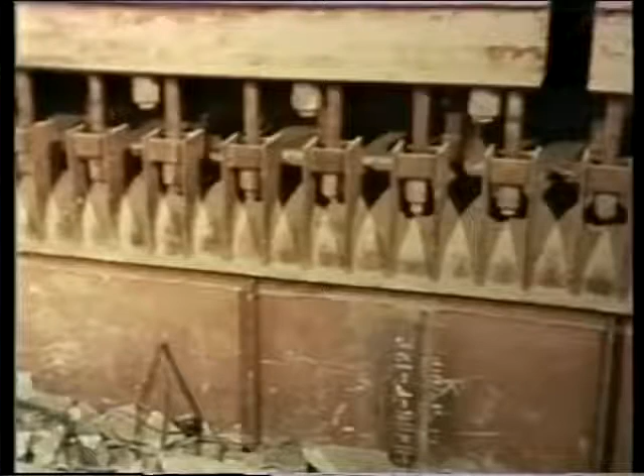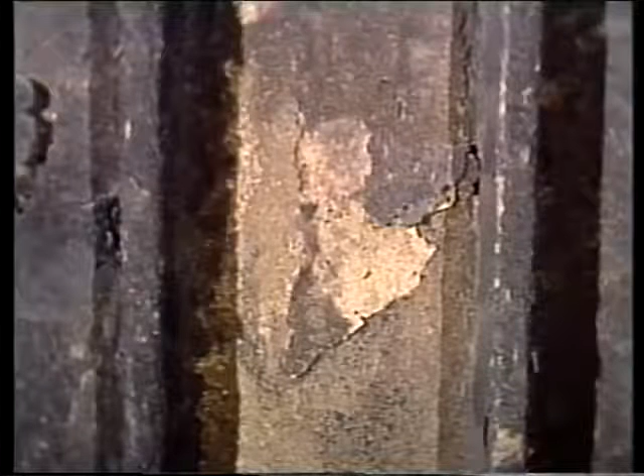The casing is hung at the top, so many of its supports are located there. To determine if there is casing support failure, look for broken or loose hangers, loose attachment bolts or pins, broken attachment lugs, and failure of any of the steel columns or beams from which the boiler is hung. Corrosion of the boiler casing can be caused by moisture, and it's a problem that can show up anywhere. Indications of corrosion are discoloration, roughness, and holes in the casing metal. Unpainted steel is particularly susceptible to corrosion attack.

A previously repaired area in the boiler casing may not only be the source of current problems, but also indicates a previous casing problem. It's a good idea to inspect any previously repaired areas to verify that the repair work is holding up and that there have been no reoccurrences. Always check the construction welds in the boiler casing. Casings are constructed from large steel plates that are welded together, and the welds should not be cracked or corroded.

There are still 4 more areas we need to discuss in connection with inspection of the boiler casing and its external features. These are casing stiffeners, casing penetrations, the boiler drum, if there is one, and safety valves.

Casing stiffeners are projections from the casing that have been installed to give the casing added strength. They look like big fins welded to the casing. These welds should be examined for cracks and corrosion. Casing stiffeners are also good indicators of buckling. If the casing buckles, the stiffeners will bend. Bent stiffeners may be easier to see than bulges in the casings.

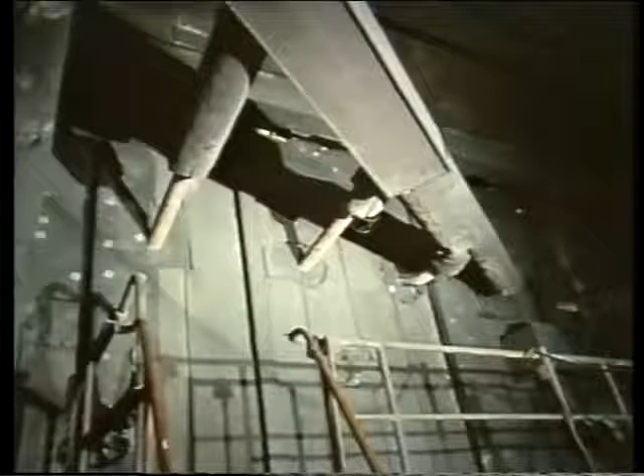Casing penetrations are the places where pipes or tubes go through the boiler casing. These are weak areas of the boiler, and failures can start here. Also, thermal expansion may press the pipe running through the boiler casing against the casing itself. This can damage the casing and the pipe. A hole in the casing can lead to corrosion.

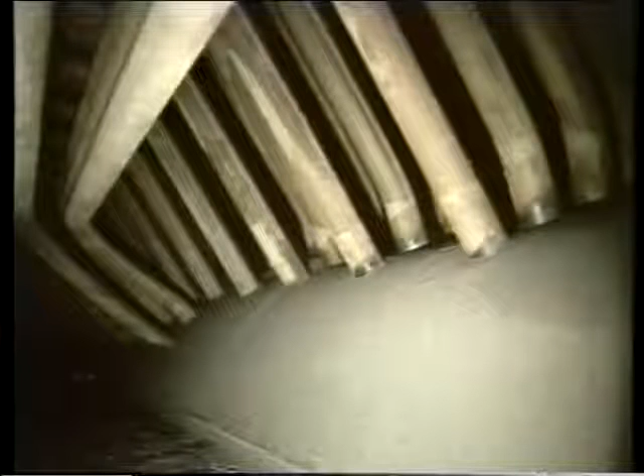While inspecting the boiler casing, you should also inspect the exposed parts of the boiler drum or moisture separator. When inspecting either one of these, look for signs of corrosion and cracking where the metal is exposed. Check the welds on all the pipes and tubes attached to them for cracking and evidence of leakage. Verify that the insulation is intact and that it has not been damaged by water.

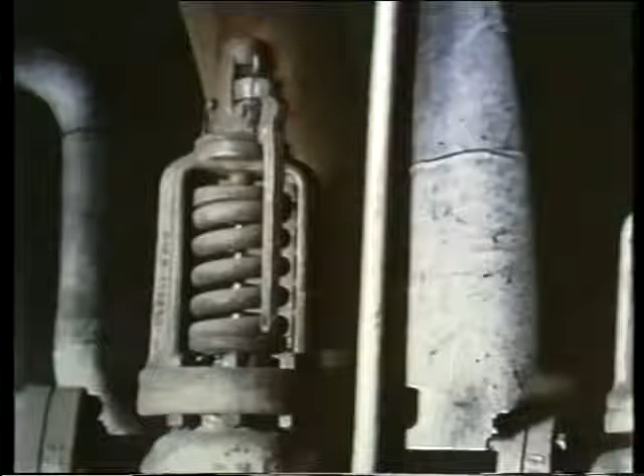Take a look at the safety valves. They can be inspected when the casing inspection is done. A complete safety valve inspection requires the valve to be disassembled, but that's not the kind of inspection we're talking about. We'll talk about that inspection another time.

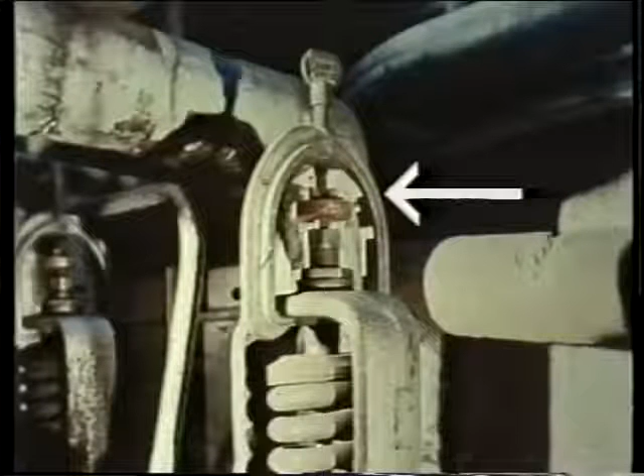Here, we want to check 2 things: that the hand releases are installed and that the valves are not gagged. The gag, placed here, is a device that keeps the safety valve from opening. When installed, it prevents the safety valve's function of relieving pressure. Well, that covers inspection of the boiler casing.

Now, let's talk about inspecting dead air space. Dead air spaces are enclosed areas outside the hot gas passages where the headers are located. These headers are your primary concern when inspecting dead air spaces. There are several common problems associated with the headers. We'll cover 6 of them: support failure, evidence of leakage, corrosion, cracks, problems in areas previously repaired, and problems with construction welds. Pay particular attention to the header supports when you inspect the upper headers.

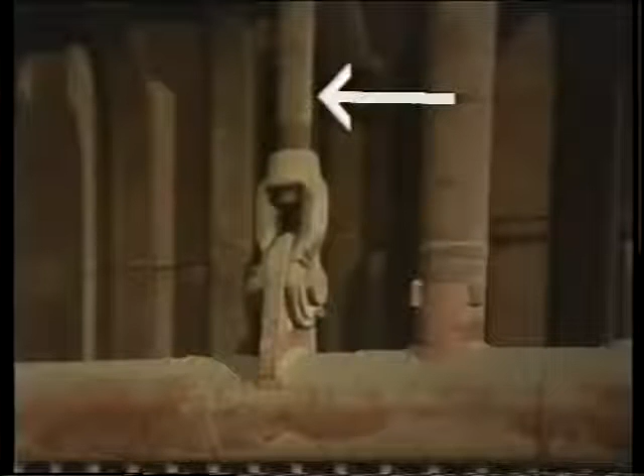These supports hold up part of the boiler, so check the headers to make sure they appear level and in proper position. When incorrect, these are both indications of support failure. Watch for broken or loose hangers, loose attachment bolts, loose pins or straps, and broken attachment lugs.

Evidence of leakage at the headers will show up as moisture deposits and discoloration of the header metal. Leaks are especially likely at places where tubes are joined to the header. Other likely leakage areas are those with other attachments to the header. Those include vents, drains, and safety valves. You should check the handhole plates for leakage.

Corrosion can also be a sign of leakage. However, keep in mind that corrosion is a problem all by itself. Check for corrosion in the same places you check the leaks. Corrosion can be detected by discoloration of the header metal.

Cracks in the headers are something else you must watch for. Look for cracks in both the header metal and in the welds in the headers. Check all the welds, both the weld repairs in the header and the construction welds. While you're checking them for cracks, also look for corrosion.

Well, that completes our talk on the problems you might run into on the outside of the boiler. The casing is subject to overheating, support failure, corrosion, problems in areas of prior repairs, and problems with construction welds. Also, we've covered the types of problems you're likely to see in casing stiffeners, at casing penetrations, in the boiler drum, and in the safety valves.